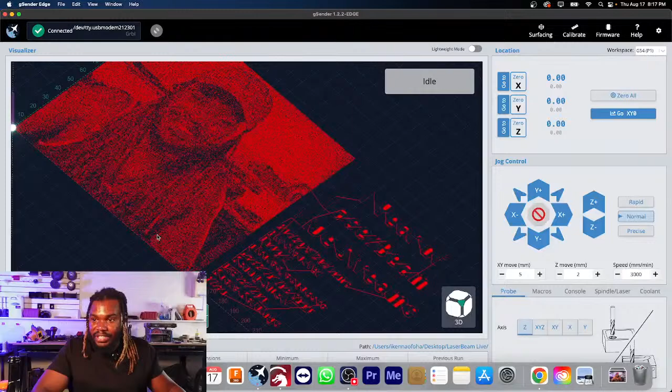All right, let's pop this open and make sure it's looking how we need it to look in terms of the G code. This is why we love gSender Edge, because we get to see the design all in red, and we get to see our text and double check. I'm not a great speller, so I'm just gonna double check the spelling: 1 year of LaserBeam live streams, and then all your usernames. I made sure to copy and paste so I can't misspell anything.

Oh Jim, thank God you just messaged. You are now included. Oh, thank you.

Yeah, the Bambu printer is actually amazing. Like at home I have a Prusa MK3, but I love playing with the Bambu printer. It is so fun, it's so beautifully designed. Yeah, my Ender 3 is sitting in my car trunk, just because of how much I love the Prusa, and I didn't have the space to keep both. So it's actually sitting in my trunk. I actually have two CR10Ss, which have 500 millimeter work area in all axes. So it's kind of crazy.

Okay Jim, we got you in here. Let's resave the code. Let's replace that. And then let's replace that here.

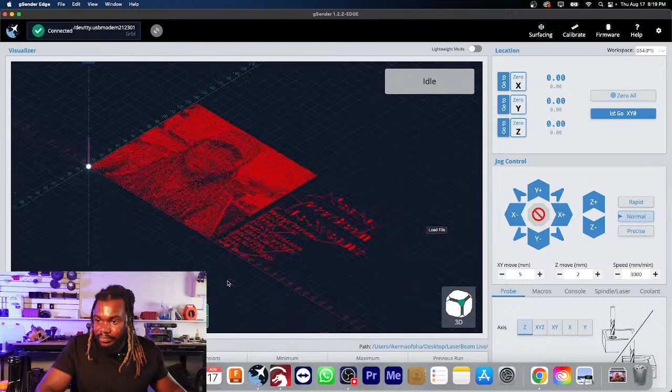All right Jim, I could see you at the bottom there. Perfect, let's double check our firmware settings. 255, 0, enabled. Let's double check that in LightBurn, make sure our S value max is 255. We're all good on that end. We are all good here.

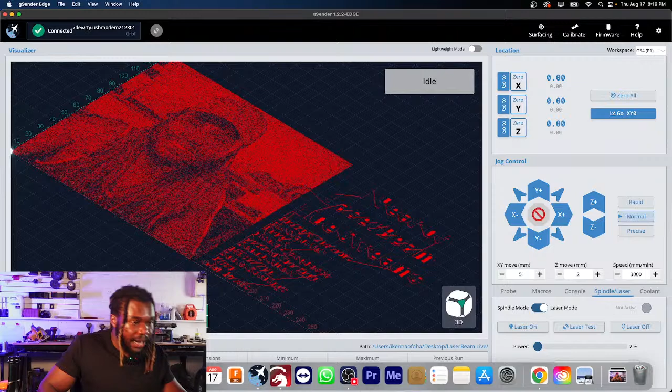Let's go ahead and focus our laser. So we're going to need our glasses. We're going to turn on our driver and just hit the reset button. There we go. We got our material, and then we just need our G2 focus finder, and we are all good.

So I am going to bring this over here. There we go. And then I'm going to raise the height just a little bit. There we go. That looks just about good.

Now I'm going to raise the height by about 6 millimeters, the thickness of this, and I'm going to focus it on this piece right here. So actually I'm going to bring it over here, to the start of my material.

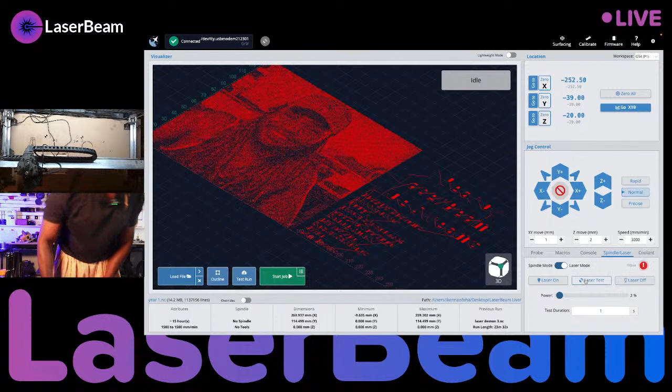So I am all good on my material. And let me just lower the power down a bit. And then I'm just about the corner, I could probably get it just a little bit better, like that. Okay, I'm happy with that. I am very happy with that.

And then now we just lower the Z by about 6 millimeters, because that's the thickness of the material that I was using to test my focus and make sure everything was in focus. So I can drop it down. Oh, sorry, wrong direction, drop it down. I am in focus, zero everything, and we are ready to go.

So let's go ahead and start this job. Thank you very much, Chris, you are the best.

Because this is something I do want to come out very nice, so I don't mind waiting. Last time it was a bit of a surprise. This time I imagined that it might take a little while.

But in the meantime, I will sip this non-alcoholic vegan champagne. And I will show my love and appreciation for you, the people who show up, the people who show your love and show your support. I appreciate every single one of you.

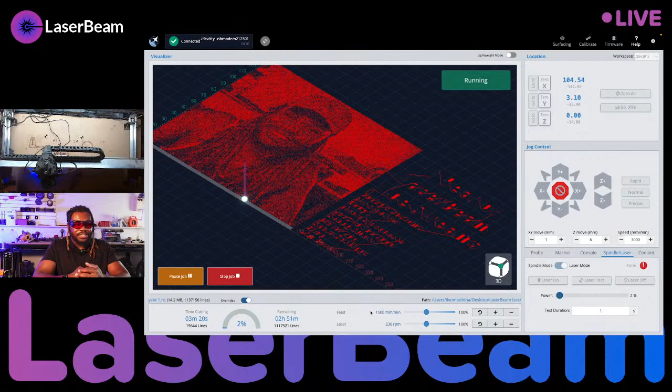So I don't mind that at all, but I know for you guys, you might not want to watch 2 hours and 50 minutes of a laser job. So that is totally fine. I understand, we're not going to make this stream that long. I'll just chat with you guys for another 30, 40 minutes. And then just like last time, we'll call it a stream.

That's cool news, Jack. I haven't done LongMill customer service in a little bit, but I don't think changing the drivers has ever been something that we do that often, so I'm pretty surprised about that. But you should reach out to our support team. They'll be able to kind of give you the numbers on that and let you know how common of an issue that is, and maybe they could even work something out with you so we can make sure you're not replacing your driver so often.

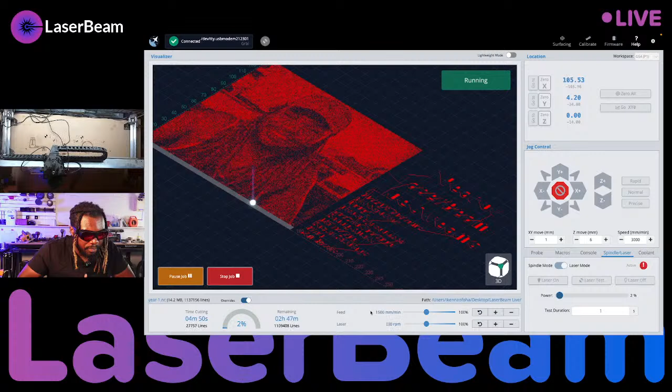Chris says that the guys at Ryan at MPCNC, he's trying to move over from Marlin to FluidNC because he doesn't even prefer it. So that's really cool.

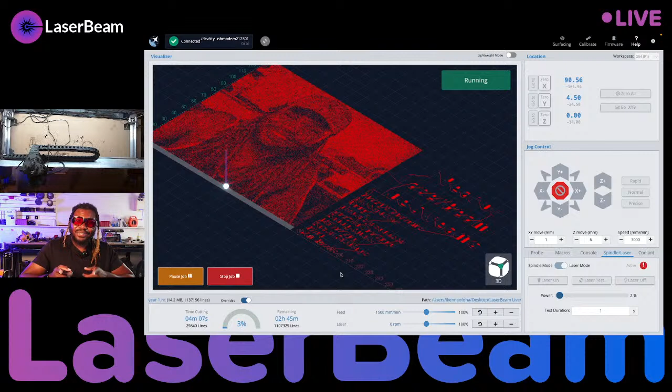Oh, the TB6600s. Yeah, no, they're not that expensive at all. They're not too bad. That will be redundant with the Super Longboard.

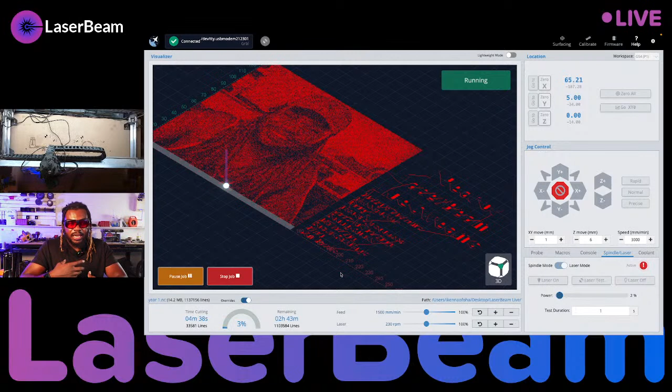Yeah, gSender Edge is very interesting. There's some very interesting features that we're all looking at. I feel like every user kind of has a different feature set that they really appreciate. So it's very cool to see all the different ones, like the A-axis for the vortex and rotary machines, right? Uh, the speed bump essentially along with LightBurn for people who want to do laser projects like me, and I'm sure Chris and all you other CNCers have certain features that you see bubbling in gSender Edge that you're like, oh my god, I would love that.

So it's a very interesting piece of software. Yeah, like guys, hey, we could check that out right now. I can pop open Andy's blog post about it. It's something that he's been working on. He's been working with a lot of the BET students and some of the engineers so that we could kind of get rid of a pain point for you guys.

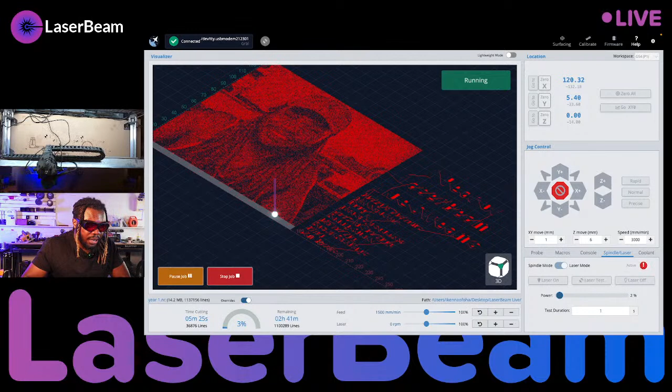Some of you guys, it might be your anti-backlash not working to the best of its ability. So it's looking very good, and I think we ordered a small batch that we'll have for sale, and then we want to leave that batch out in the wild for a little bit so we can hear back and see if it's going to be a long-term solution. And then if we figure that it's a long-term solution, then it's something that we can implement on every stock CNC. Hold up,

Let me pull this up so we can take a look at Andy's article.

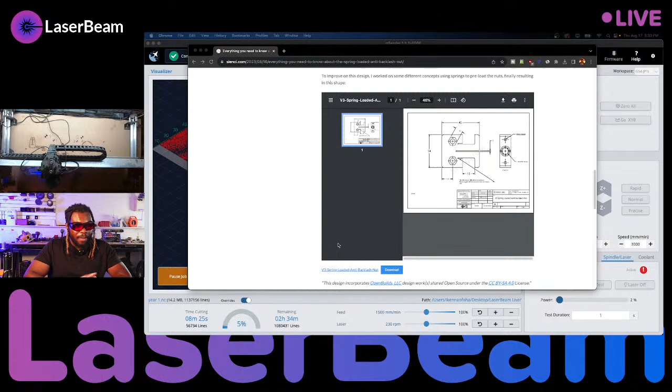So Andy is weighing a few things, and I think it's cool to design something, test it in house, and then do a small batch. If people like it and it works long term, that could become the new stock anti-backlash nut. I think that's a great way to release product updates, especially small part updates that aren't big enough to consider a new mark of the machine, but if it decreases friction in our customers' experience with the LongMill, that's a bonus.

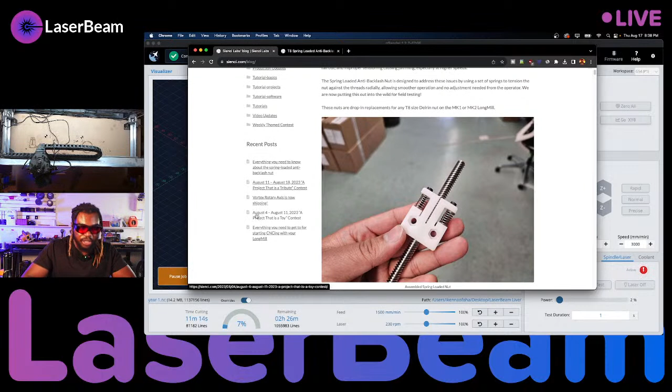Again, just check out the blog because it's not just about product releases, it's about just about everything. If you're waiting on your machine and want to know what's happening with production, you can check it out. If you want updates for the super longboard, Chris usually posts updates as production and development ramps up.

Guys, you get updates on the Vortex. I know some of you have received your Vortexes, which is very exciting. We had our first pickup. Very fun stuff.

And then obviously you get to check out all the contests. So this week's contest, you can see, this week is a project that is a tribute. So very cool. Check that out, very cool stuff.

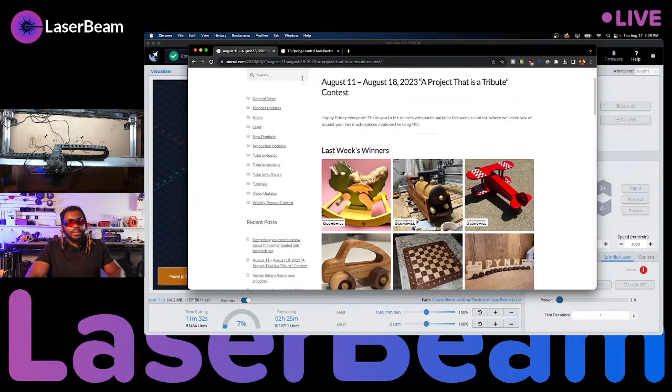I'm very proud of what we do at this company. There's always something interesting being worked on, and always cool stuff being made to push forward. There is a lot of strength in being so open and transparent with our production, our operations, and our product development. There is a lot of strength in that. I think you guys appreciate the transparency, where you can just ask a question and we already have the information up there. We have the decision, the philosophy behind the decision making. That's one of the things that really intrigued me about this company about 4 years ago when I met these guys and saw what they were working on. And that's something that intrigues me and I'm kind of proud of to this day.

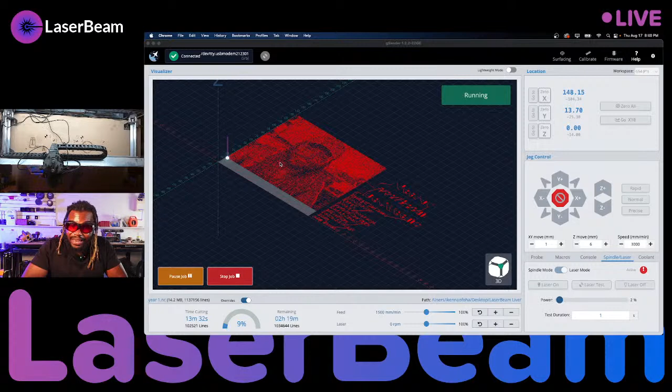Yeah guys, if you have received your Vortex or will be receiving it in the next little bit, there have been little tweaks, little changes, little upgrades on the very newest gSender Edge that should give you a smoother experience when operating it. You saw me, when I was operating it, I was able to change a few things in Lightburn and have it running on gSender Edge. The first time I ran it, when we first launched the pre-order, you saw that I made a few tweaks in G-Sender in the EEPROM settings, and I was able to run it fine.

So guys, if you're interested about that, again, we keep everything on the website, G-Sender. Check it out, all you got to do is under software, click on it. You can see all the new releases. gSender Edge can be found here. You got 1.3.0.

Yeah, I agree, Nicholas. I really liked our G-Sender walkthrough, they really thought about that one. They came back on a second day of shooting to reshoot certain things to make sure the video was as informative and entertaining to watch as possible. So definitely cool stuff.

Oh yeah, definitely try Edge guys. You can see the visualization for laser is just amazing. I was able to make sure that my file is being interpreted as I designed it in Lightburn, and I was even able to double check the text and make sure it was all good. I made sure that we added Jim last second, and everything worked out, and I was able to double check it visually without having to double check my file name.

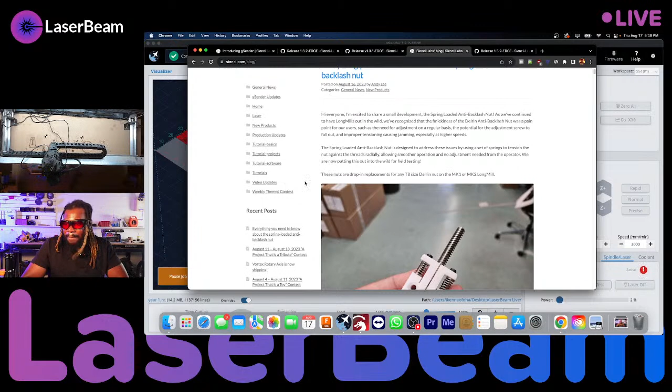That's great to hear, this is going to be a very cool project. Every time it's even whispered, customers come out of the woodwork to show their interest in it, because it's really a cool piece of development, engineering, and passion being put into this product. I'm not even a very technical guy, I'm more of a vibes and feeling, does it look good kind of person, but even I feel the palpable excitement around the super longboard.

Technically 4-axis control by default, because they're aiming to have an independent Y-axis control, which is just chef's kiss.

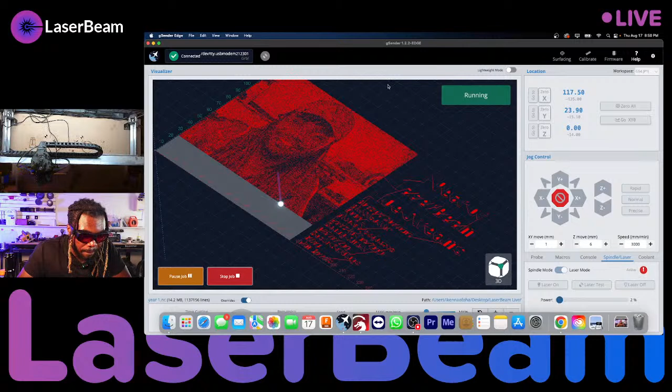5-axis control is the ability to have 5-axis control on a super longboard, where you have X, Y, Y, Z, and then the potential for A, whether that's our Vortex or your own internal system.

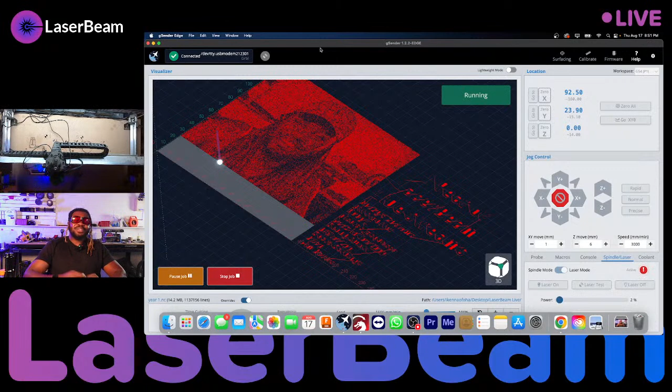People want to know, Chris, when is the potential release? I know we don't make promises until we know we can keep them, but what's the timeline looking at? Roughly a guesstimation, nobody hold him to this, this isn't him promising. This is just us asking to see if he's generous enough to give an estimated release timeline.

They are aiming for end of year. You heard it from our CTO himself. Of course we don't make promises, when we do make a promise on delivery you'll know, and we'll do our best to keep it. So don't circle a specific date, just circle the general timeline, end of year-ish.

Oh yeah, here guys, I'll give you a preview here. Let me see if I can use my phone as the webcam, I should be able to do that.

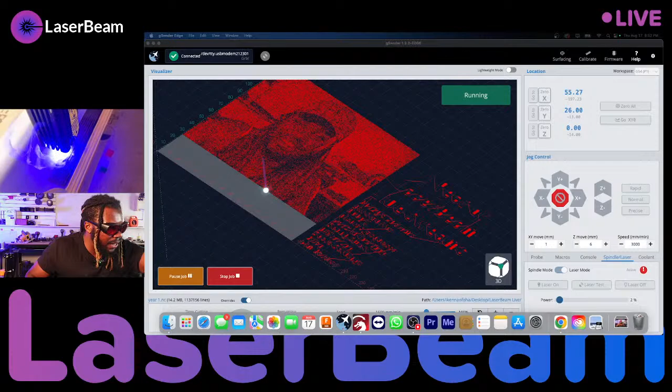Okay, you guys can see. Hopefully you guys can see that a bit, I'll make it a little bigger here. You guys can see the progress.

We're about a fourth of the way done with the image. The image is going to be the bulk of it, and then it's going to do all the text afterwards. We're going to end the stream in about 10 minutes, but I'm going to be at the office for another hour or two.

It's looking like we've got about an hour and 50 minutes left, which I think will actually get finished in about an hour. So not too bad, nothing too bad, I won't be here too late.

I didn't realize how easy it was to use your iPhone as a webcam. Yeah, hopefully you guys can kind of see the details.

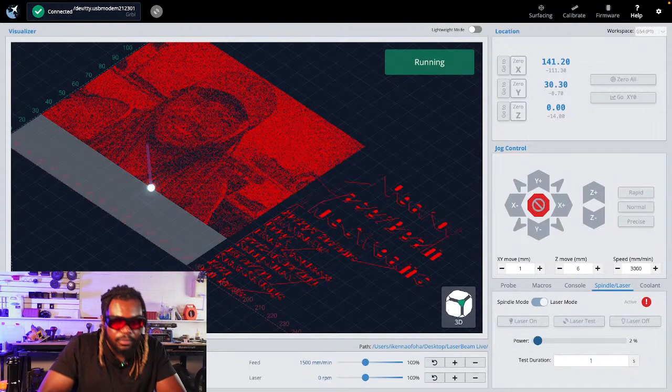I think I did write about that in our resource section under the air assist. So the air assist also means less lens cleaning, of course, so you can use it all the time.

Yes, I did actually, I have some parts coming in. I'm going to try to use our stock magnets that get used for the dust shoe, and the Vortex team actually uses the stock magnets, so I think it'll make sense to use the stock magnets for our magnetic mount.

So I'm currently working on a magnetic mount and magnetic connectors. It'll be a cable kit that plugs into your regular connectors. One will go all the way to your driver, so it'll be a replacement cable, and one will just connect to our current connectors on the LaserBeam. So that technically will extend your LaserBeam wire a little bit, and then the connection will be magnetic.

So Daryl, you can go to our last live stream to watch me use all the offsets. I get the offsets for our version 1 and version 2, and I go through the process of teaching you how to get the offsets for a 65mm router mount version 1 and version 2. Just go to our YouTube channel, you can wait till the end of the stream or go now. That information is more important to you.